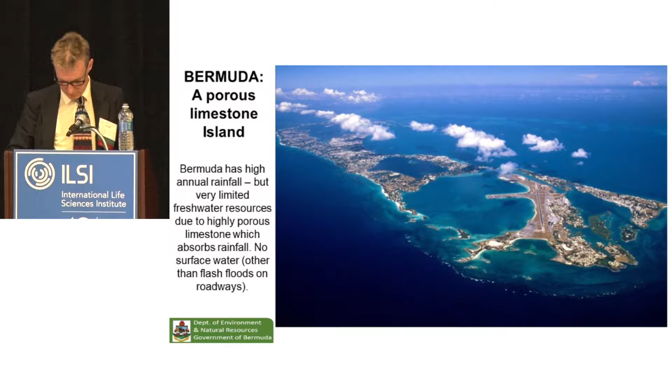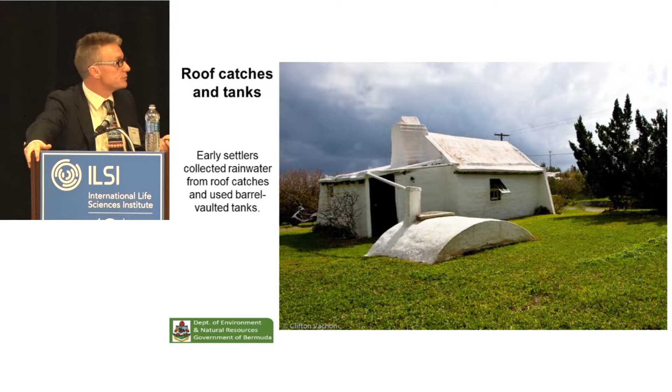This is a house of what an early settler's house may look like. You'll notice, first of all, there's a barrel tank in the garden. You'll see some pipes connecting that from the roof, and the roof will have a gutter. This is basically how early settlers collected rainwater into the tank and then used that for various purposes in the household.

If you calculate the roof area, both residential and commercial, and the various rain catches on the island, then multiply that by the rainfall for those years, on this scale from 1961 to 2016, you can see there's quite a lot of variability. There are some periods of drought in that. Generally people were surviving on about 40 gallons per day, which is not sufficient for today's standards, so we have to look at supplemental water. I'll come back to this.

If you look here, you can see the population growth. It was very easy to calculate the amount of water per year, but the roof area changes were only calculated for one year, and then we calculated back, assuming that the population and the roof area were closely related.

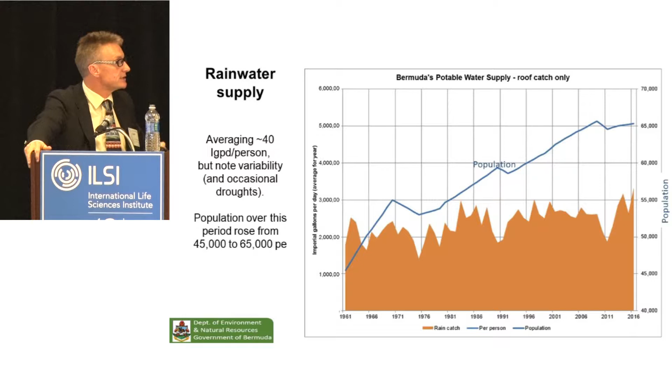You can see here on these images, if I scroll down, those red lines depict the catches of the rainwater, and this process was seen to be so effective that it was actually put into legislation. We have the Public Health Water Storage Regulations of 1951, and it's also in the Residential and Commercial Building Code, that you have to capture 80% of your roof area of rainwater to put that in a tank.

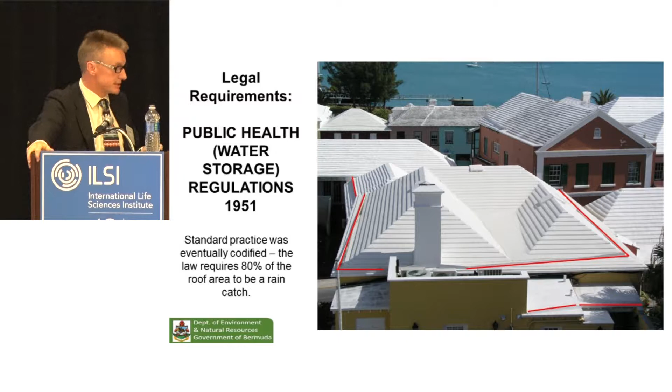And then there was a requirement on the water tank. Typically these are below the house, below one of the rooms. And you have to, according to the law, capture 10 gallons for every square foot of roof area.

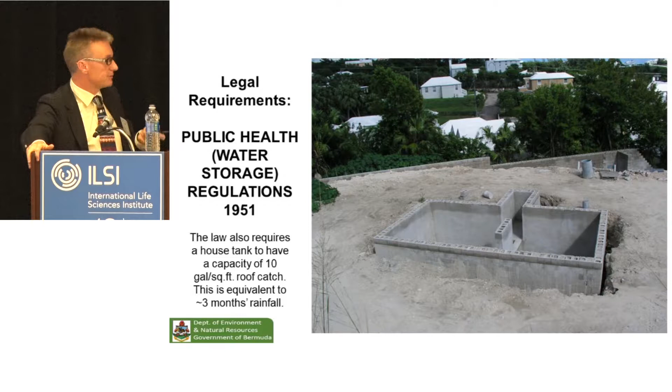You'll notice here with the water tank that there is a divide in the middle. It's continuous at high levels, but when you do run out of water, you do then have a switch over to the other half of the tank, a bit like on your motorbike if you run out of fuel. And if you're not monitoring your water, that's a bit of a godsend, really. So that's very useful.

If, however, you run out of water, typically the size of the water tanks are sized for a 3-month duration. So if you have a 3-month drought, you should be fine for a typical 3-bedroom household, not a condominium. But if you do run out of water, then you need to go to supplemental water.

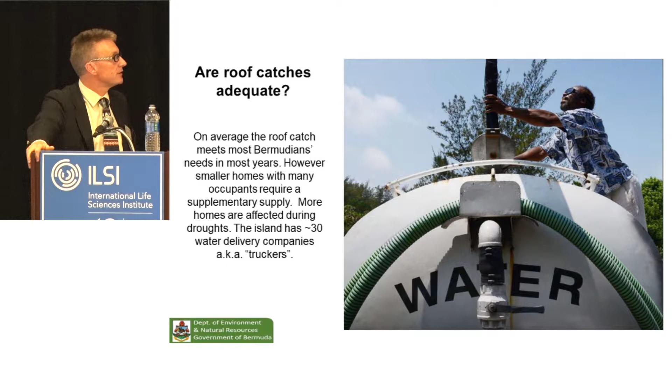This originally was from water truckers, and they typically charge around $90 for 1,000 gallons. If you're lucky to get one, you'll probably go for 2 loads, that's $180 for 2,000 gallons. If you're lucky enough to be connected to a piped water main where they're treating to reverse osmosis standards, then you're paying typically around $23 for 1,000 gallons, and you typically have to buy 1,000 every month. So that's how we deal with water shortages.

But the early settlers also dug wells in addition to the collection in the water tanks from their roofs. They dug wells that were over some of the freshwater lenses that I'll come onto shortly, and that was how they sustained their water. Watlington Waterworks was the first private company, started up in 1932, and then government started in about the 1960s to treat water and then put it down various water mains.

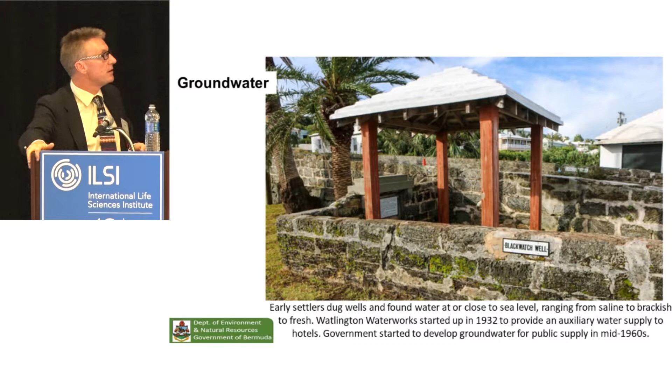The central lens, however, is a very thick lens, up to about 12 meters thick in parts of it. And this is used by the commercial abstractors, whether it be government or Watlington Waterworks, to treat.

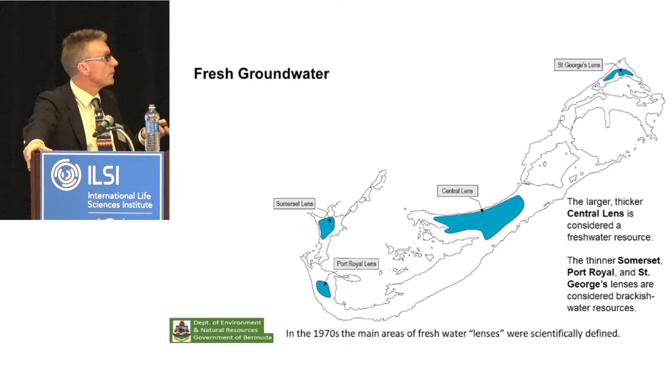So the blue contour here is the 2-meter depth contour of the freshwater lens surrounding the central lens. And it was necessary to break the central lens up with modelling into various sectors, and to then basically allocate sectors to various organisations, and then tell them they couldn't abstract over a certain amount.

This came in after a very detailed scientific study in the 1970s that led to the Water Resources Act being created in 1975. You can see there, based on the colour, whether the sectors have been allocated to government, to Bermuda Waterworks, the private supplier who was first in this business, and then to some of the private water truckers.

We monitor the volume in those lenses every quarter, or if they're not in any critical state, then we may stretch that out to once a year.

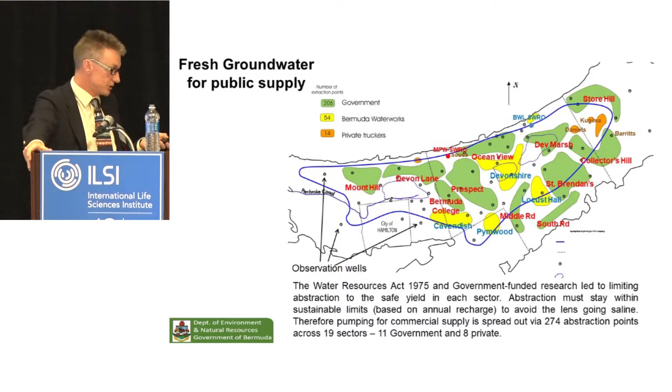This is the water distribution. The blue line is the government, and the red line is the Bermuda Waterworks. At the moment, government's in the process of selling or passing over the West End water main to the private contractor that tends to operate a little bit more efficiently.

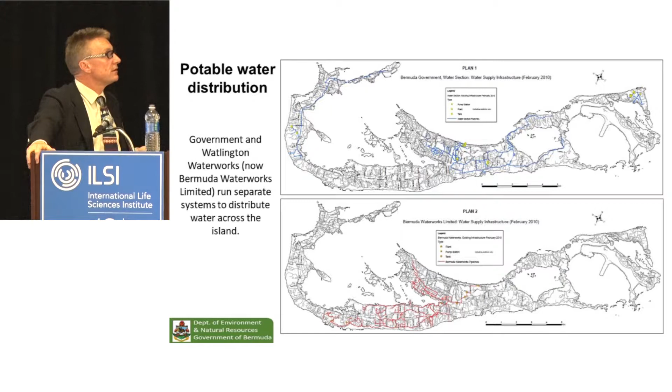So other supplemental water, if you are lucky enough to be on a water main, then you will have access to saltwater reverse osmosis. These are the 3 government facilities, and then there are the private facilities as well. The central facility in Devonshire is rated at 1 million imperial gallons per day, and that actually receives its power from a steam turbine that's connected, receiving the waste heat from the municipal incinerator on the island.

We don't have any organic landfills here. There is an inert landfill that you would have seen coming in by airplane down near the airport, and that just receives aggregates, metal waste—we're still trying to get the vehicles off the island. It also receives ash from the incinerator that we mix with concrete or cement to make into concrete blocks, and those are used for shore revetment along that area.

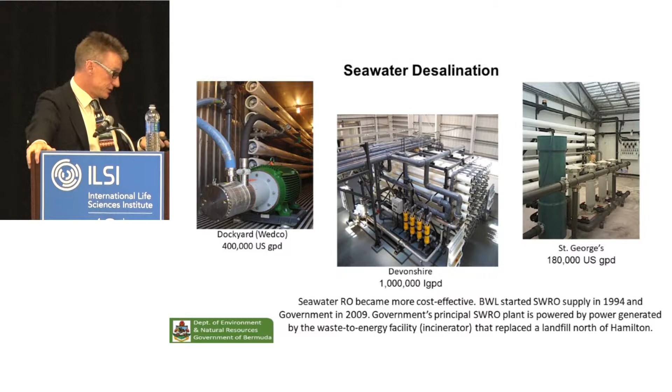So that's the seawater reverse osmosis plants that government owns. And if you add the supplemental water to the rain catch graph, this is a cumulative graph, so I've literally just added them all together. You can see the graph on the bottom is the Bermuda Waterworks Limited, the blue graph down here.

After the Water Resources Act was implemented in the mid-70s, you can see that we had to limit their abstraction from the sectors they were operating from, because they were over-abstracting. The issue with over-abstracting is that if it does get replaced with saline, it's very difficult for that freshwater lens to reoccur. It takes a lot longer.

At the same time, government had access to a lot more sectors, and you can see government's in red, the bar graph increasing significantly, but a little bit erratically, and it has dropped off of late, which we are addressing and looking to hand over some of those sectors, water rights, under the Water Resources Act to the private operator in this field.

As you can see, they literally use the maximum, that's why that blue line is continuous really from about 1991, it hardly shifts. They use the maximum allocated water right of the lens because they know it's far cheaper to squeeze fresh water, or potable water, out of fresh water at 10 bar pressure through a reverse osmosis membrane than it is to squeeze it out of seawater with the osmotic potential. You need about 70 bars. And here in Bermuda we pay 40 to 45 cents a kilowatt, so it's a huge cost.

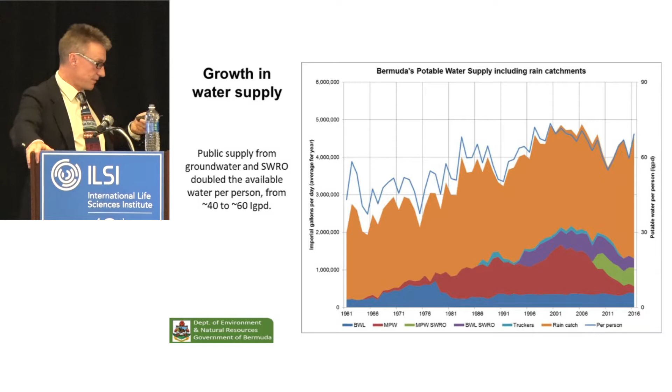Okay, we have about 4,000 water rights under the Water Resources Act. The blue dots are the wells. Most of them are people who want to supplement their water for toilet flushing, or if they're lucky enough to be over a freshwater lens, they will use the well water for laundry.

The red symbols are the boreholes, disposal boreholes. So the wells will be used for anything from toilet flushing, laundry, the commercial abstractors we heard about, and also for water cooling, so you have to spend less on air conditioning, and for irrigation as well if you're over a freshwater lens.

Similarly, the boreholes are used to receive treated wastewater from aerated sewage treatment plants and also from some septic tanks, and also for the return of cooling water and rainwater, stormwater management. So there's quite a few there, keeps us busy. These are only renewed every 5 years, otherwise it'd be an administrative nightmare.

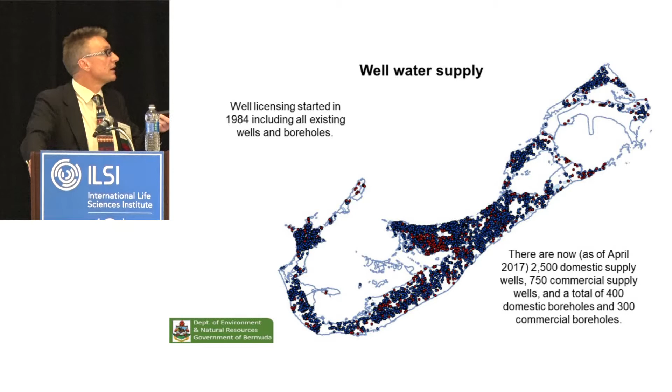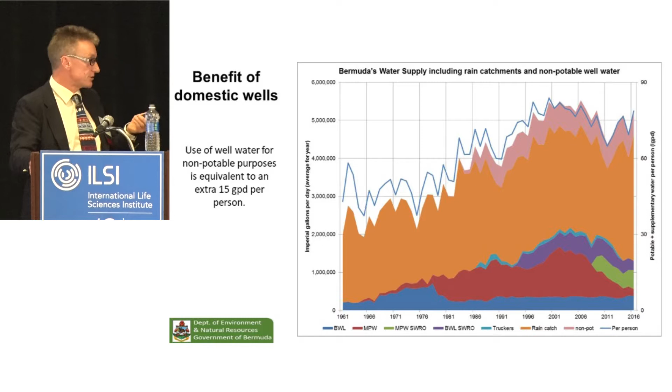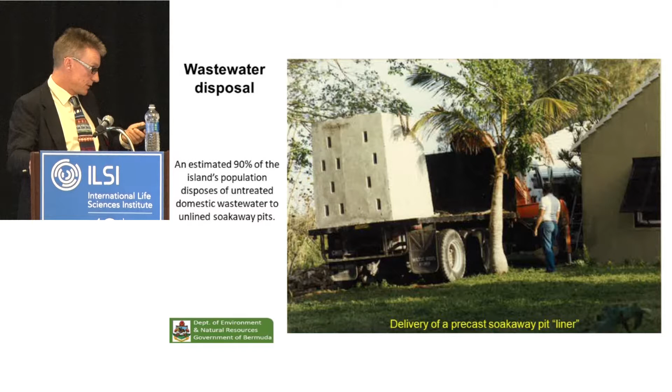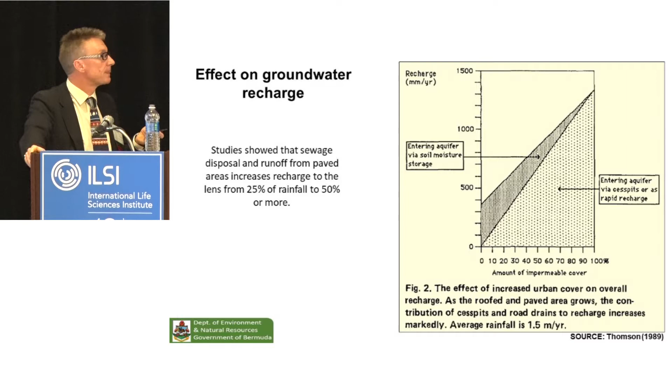So basically, the urbanization of Bermuda has helped to sustain a lot of the groundwater resources. And we've had challenges. Obviously, nitrate levels started to rise, so they had to shift from just pure sterilization of the potable water that is treated before it's sent out on the water main to go into reverse osmosis. That was back in the 1970s for the fresh water.

Similarly, if you've got wells near some of the marshes, you can have hydrogen sulfide contamination, and the water companies tend to use that to their advantage. Rather than taking out the hydrogen sulfide by sparging and acidification before the treatment of the reverse osmosis, they put the reducing water through the reverse osmosis plant where they get less corrosion of their stainless steel components, and then they will sparge out the hydrogen sulfide at the end when it's ready to go to storage through a final sand filter.

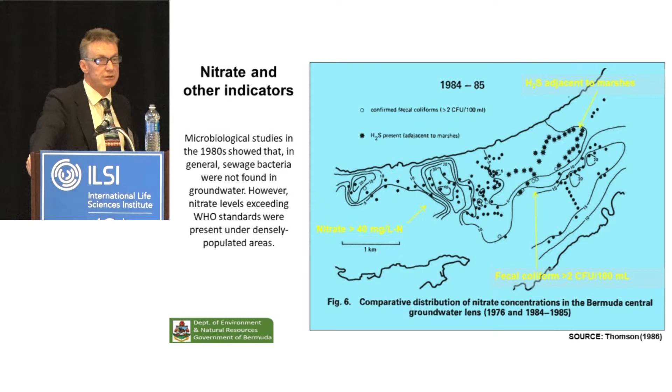Okay, here you can see for some of the most densely populated areas, the rise in nitrate was considerable in the 1970s, which triggered the switch from sterilization of the groundwater to filtration, to reverse osmosis, typically.

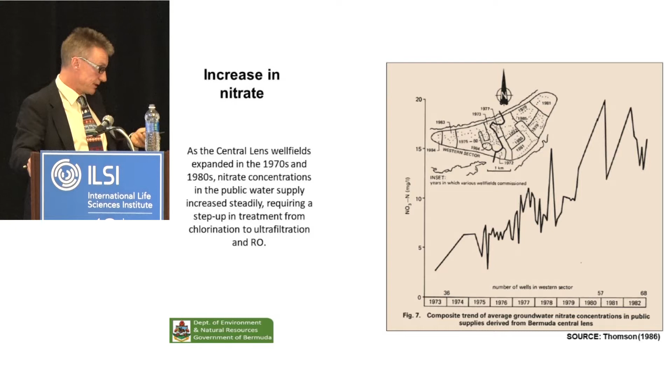All of these aerated sewage treatment plants need licenses under the Water Resources Act and construction permits, so they come to us for that. We then will set limits on the treatment quality. If you then want to reuse that wastewater, we will then typically crib off the US EPA reuse guidelines. We don't need to reinvent any wheels, and we will then set the standard for that for the water reuse, whether it be for toilet flush or irrigation, golf courses and things like that, where there's a risk of it coming into contact with people.

In fact, this hotel here has got a secondary aerated sewage treatment plant. It puts the treated wastewater into the pond in the front on South Shore, where there's some reeds and so on. That is then used as a reservoir for irrigation, and then they take from that pond and put it through the flocculating agents and sand filters. Antiseptic is added, and then a faint blue dye, and you'll notice it may be coming back to you in your toilet flush water. In fact, as was mentioned earlier, there will be a tour, I believe, of just the water processing. I don't think we'll be traipsing people over and through the sewage treatment plant, but you never know.

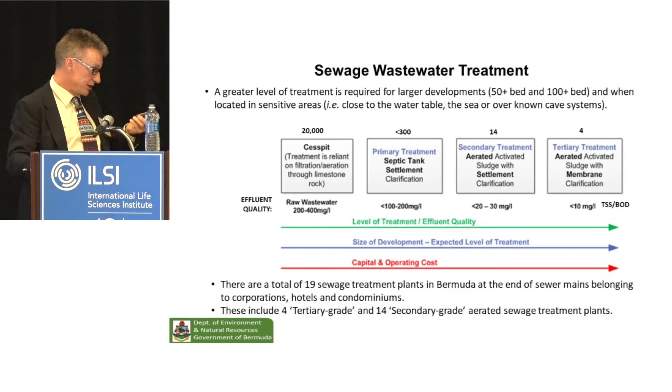I did mention sensitive areas. We don't let all developments put in cesspits where the wastewater effectively gets treated through the aerated geology, the limestone, before it hits the water table. There's certain places where they can't put them. And those sensitive areas relate to, first of all, the level of limestone that's got air in it beneath the cesspit to the water table. If it's too shallow, less than 4 feet or typically less than 10 foot at grade, then we'll ask them to put in a septic tank to a deep seal borehole.

If they're very close to the coast, within 40 feet, then they can't put a cesspit in either. So all those blue areas depict the water protection areas that basically instruct planning what to expect, and what developers need to provide in terms of the level of treatment required in those areas.

And then finally, we have caves in Bermuda. Some of the older limestone has had a lot of dissolution, especially over the glaciation periods, so we've got some marvellous caves here. The red stars are just the places where the caves have entrances at the surface.

We have some unique species in these caves, so we don't want this wastewater to percolate down into them, so we set limitations on them.

Up at Morgan's Point, where there's development going on at the moment on a brownfield site, there was a bit of a land swap, because the developer was going to develop some of the beautiful greenfield area on South Shore that we didn't want developed. So they did a land swap with what was the old American base at Morgan's Point.

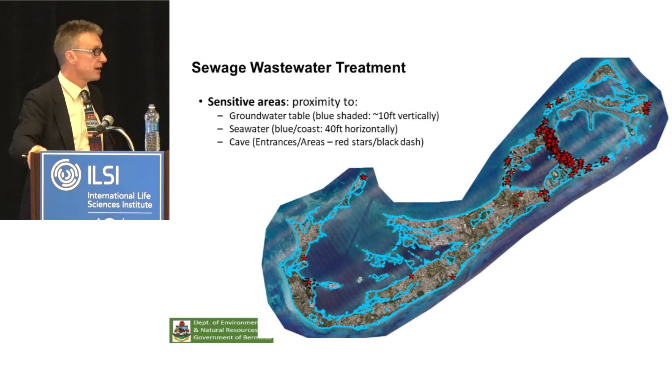That's a way that ultimately we can stop any impact to caves, and within those caves you'd probably just see a concrete shaft with this liner around it. That's a first for Bermuda - we did it last Saturday.

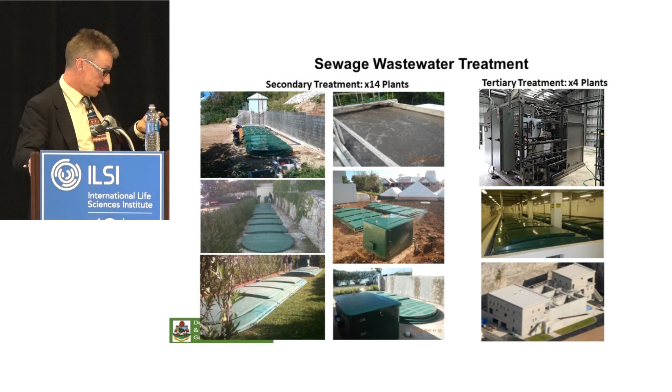Okay, these are just some pictures of the secondary and tertiary wastewater treatment plants in Bermuda. These are some of the sewer mains that exist.

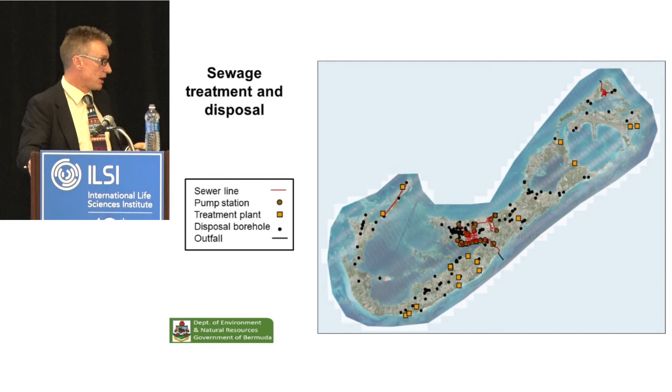There's one at the west end, WEDCO, which is a quango of government, that treats to a tertiary level and then sends the wastewater back out as toilet flush water. It's a bit of a win-win because they also generate potable water, not from the wastewater. So there's basically 3 bills you're going to get from them if you're on the WEDCO line.

At the far east we have the Corporation of St. George's, and in the middle we have the Corporation of Hamilton, which I've got some more slides on.

Basically the disposal boreholes are connected to septic tanks. The treatment plants you can see with the square symbols, and this square symbol here is the Southampton Princess - sorry, Fairmont Southampton, got to get the name right.

There's two of us. That's right. And yeah, there's pump stations and so on.

This is the Corporation of Hamilton. So there's some government facilities - Cedar Bridge, there's a septage facility by the incinerator, and there's another government school out here, and then there's some developments in the back of town.

The Corporation of Hamilton is this square area here, but we collect the wastewater from other places as well. There was a 6mm screen, now a 3mm screen, and they're looking to put in a microscreen this year.

They're possibly also looking at peracetic acid injection, which would have the residence time in the outfall to provide some sterilization capability.

Also feeding into this line is the hospital, the new hospital, which is treating to a tertiary standard - so that's literally adding clear wastewater into this raw but screened wastewater going to the outfall.

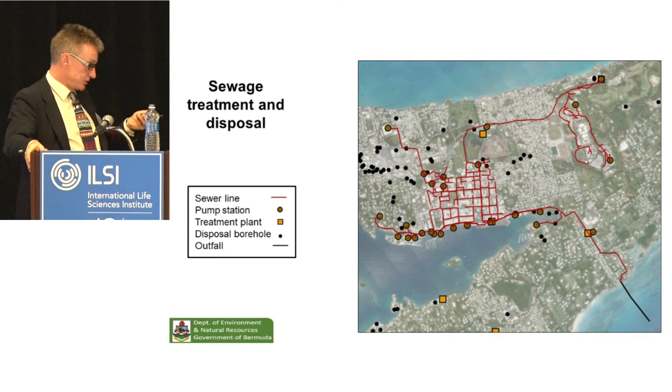Corporation of St. George's, which is the old city in Bermuda, has a sewer main as well with an outfall also.

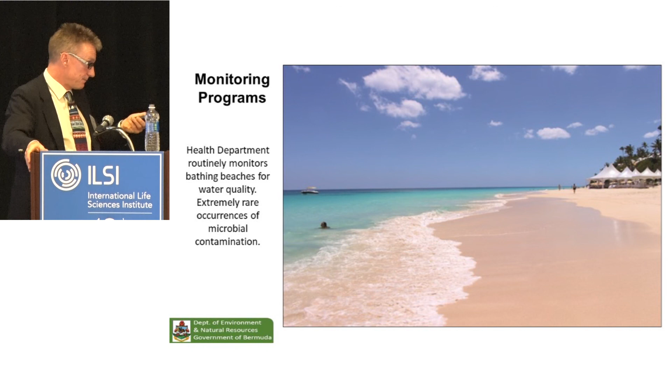And I think that concludes my presentation. Thank you very much.